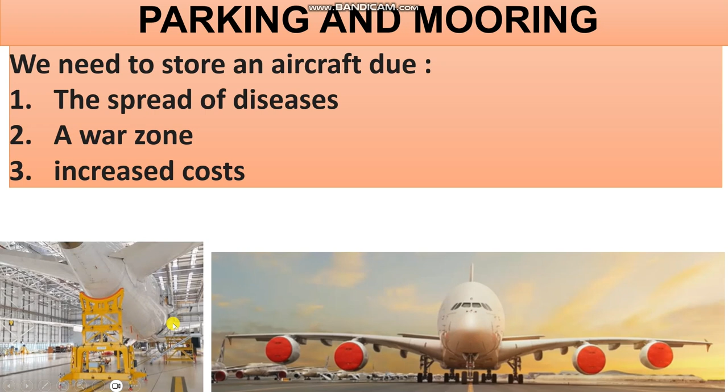Here are some figures about closing the access, the open areas. Here are the inlets of the engines. Also, the exhaust of the engine must be closed. Here, stored over docks for long times.

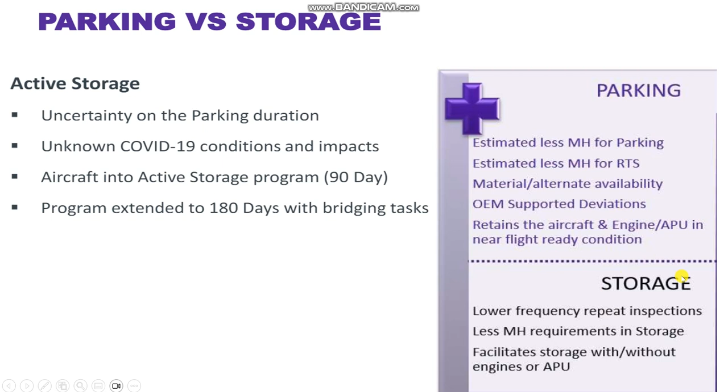This is the IATA document, aircraft storage, here parking and storage, making a comparison. This is the Airbus Safety First, the airplane parking. Parking has 3 types or 3 cases. Normal parking means the aircraft comes from a flight and goes to the stand or to the finger. This is normal parking, about 2, 3, 4 hours between flights. But prolonged parking may be 7 days and more. There is a table for prolonged parking.

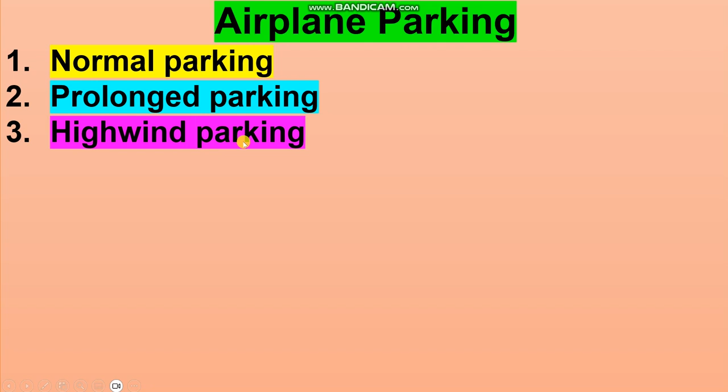High wind parking: special cases for high wind, more than so and so miles. When you put the aircraft in long-time parking or storage, you must cover pitot-static probes. Static probes covers are recommended when the airplane is parked for more than a standard turnaround or when conditions such as insect activity, dust storms, or volcanic ash may increase the risk of pitot-static probe contamination, a pitot-static system blocked by foreign objects such as insects or maybe dust.

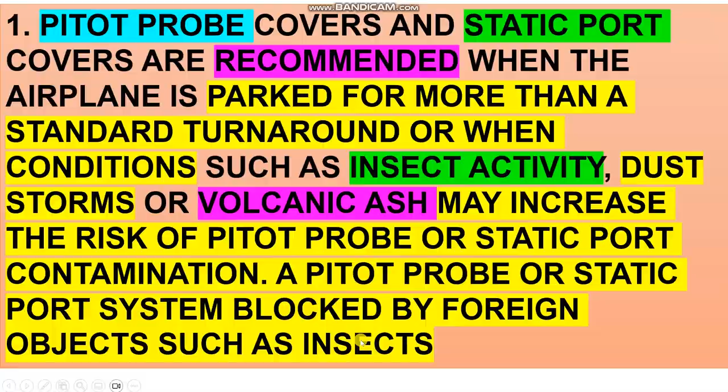Okay. Take care here. Failure to remove covers from the pitot-static probes before flight may cause large errors in airspeed sensing and altitude sensing signals, which may lead to loss of safe flight. In cold weather, it is necessary to drain the fuel tank sumps prior to refueling to remove water from the fuel. Please follow your aircraft maintenance manual procedure.

Put the covers on the openings, vents, and scoops on the airplane to keep out unwanted material. Make sure that the aileron control wheel is in the neutral position. Close all lavatory doors. Put the covers on these components to prevent contamination from dust, debris, and volcanic ash: pitot-static probes, APU exhaust, engine inlet, fan exhaust. By the way, on the APU exhaust, I found a bird nest when it was opened. So don't forget to close it. Engine inlet, fan exhaust, and turbine exhaust.

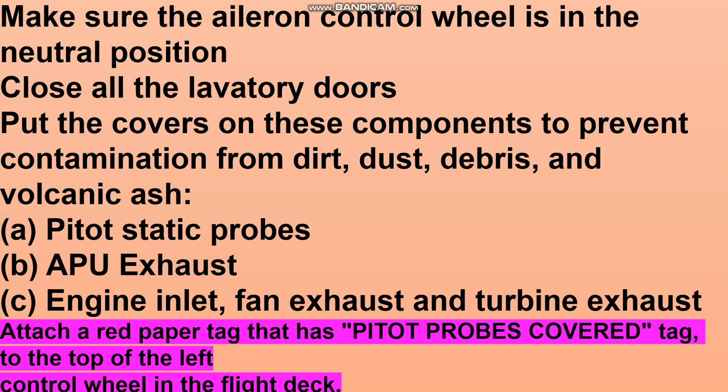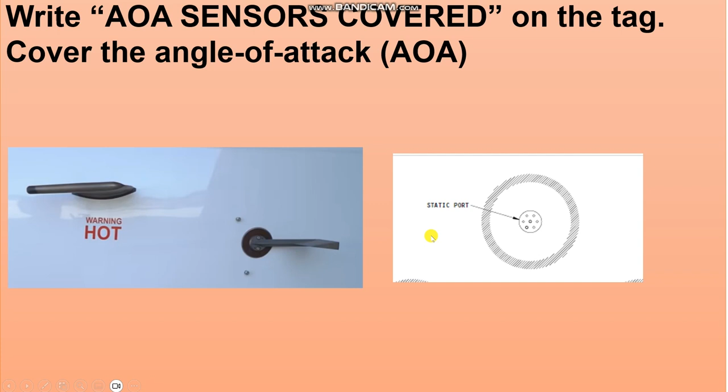Take care here. For precaution, attach a red paper tag that says pitot probes covered, to make maintenance take care to remove any covers before flight. Also, write angle of attack sensors covered on the tag, if you cover the angle of attack. Here is the angle of attack and static. Okay, look here. These are vents. Take care: when you close this, you must follow the maintenance manual procedure. Okay, also for this.

About chocks. Chocks installation in wind or wind gusts to a maximum of 35 knots. In this case, you put the chocks near the wheels, but in standard parking, you put the chocks away from the wheels approximately 2 inches. Why? When a load is added to the airplane, the tires can prevent removal. Sometimes it is difficult to remove the chocks when you want to remove them. Okay?

Put the main landing gear chocks approximately 2 inches from the tire. Now the same thing: put chocks at the nose landing gear and main landing gear tires such that they touch the tire. So touch the tires when there is wind, but in normal conditions, make a 2-inch clearance.

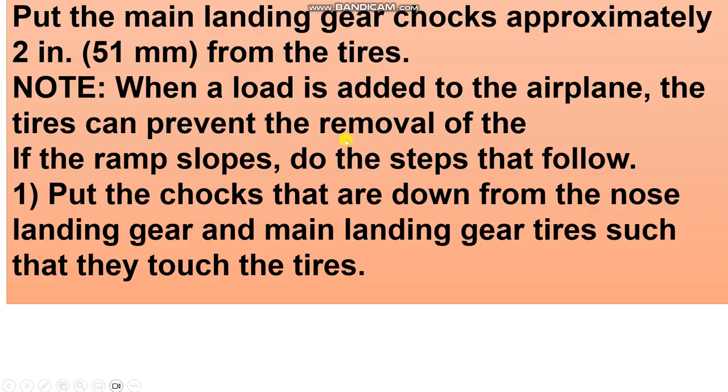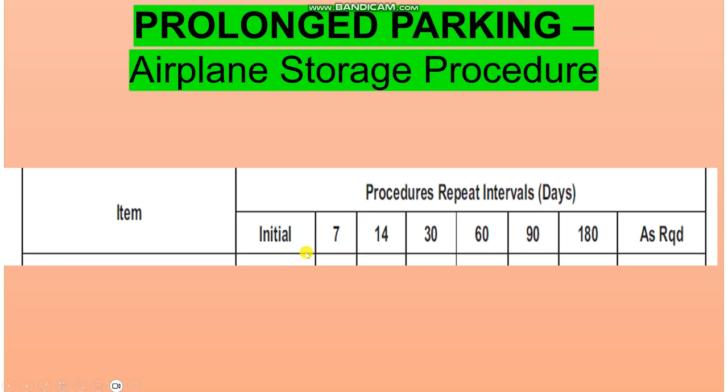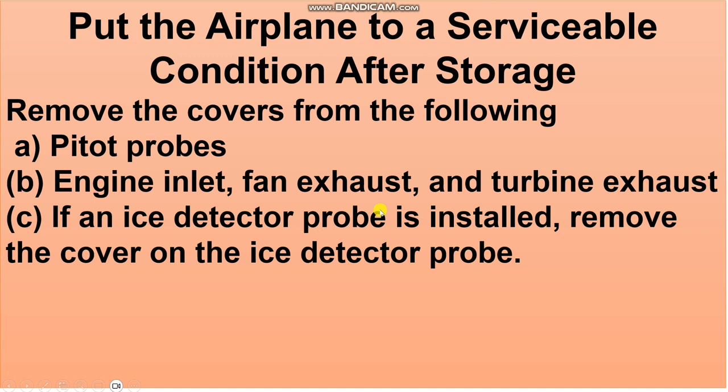Here, put the airplane in serviceable condition after storage. Each item you did to store or park, you must remove, such as remove pitot probe, engine inlet, fan exhaust covers. Any closed area, you must remove the covers.